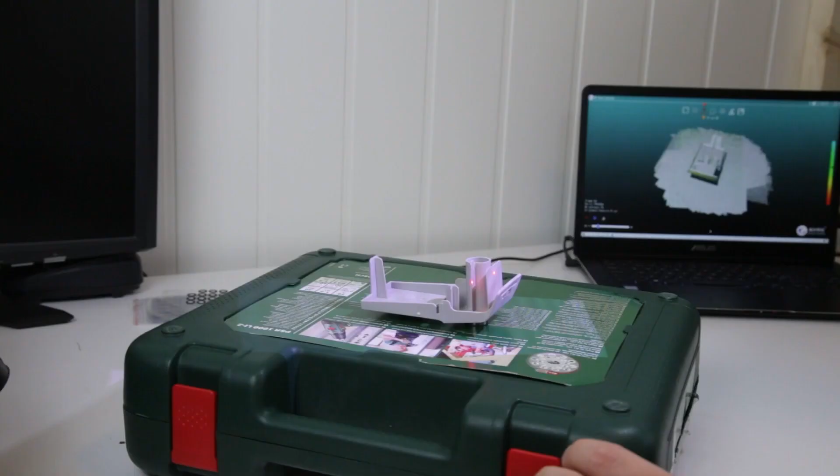Let's first look at some of the specs. This is a handheld structured light 3D scanner designed for capturing objects of around 20 centimeters up to 2 meters, depending on how you're using it. You can always go bigger or smaller, but that's around it. It features a dual field of view mode, meaning you can focus in on smaller objects or cover a larger area, which helps tracking larger objects.

In optimal scenarios, you're getting around 3 million scanning points per second, with an end resolution of around 0.25 millimeters in the mesh. The overall accuracy depends on how you scan and what you're scanning, but it should be below 1 millimeter per meter. This means you have great specs for scanning both large and small objects in this price range, while still achieving really good accuracy. However, as with most scanners, it depends on you, the user, and the object, depending on how you can track them and what the actual accuracy is that you end up with.

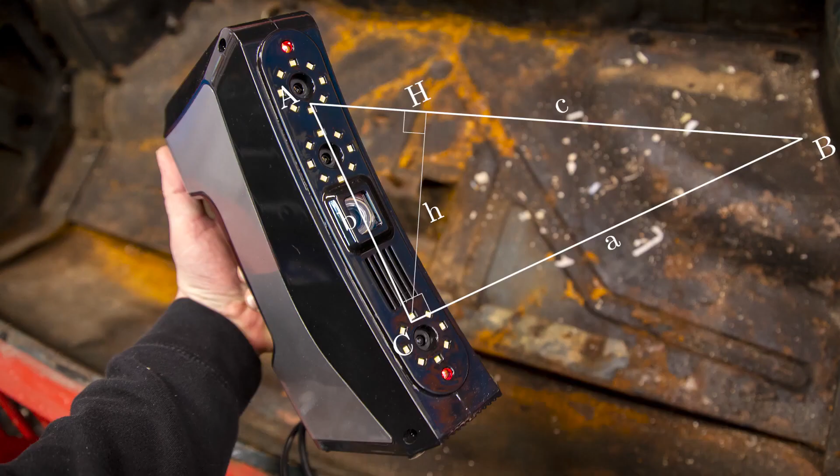The Archer W is a projected light 3D scanner using a white light pattern projected onto your objects. Two cameras then record that pattern from their own angles, and using your favorite algorithm from school, the Pythagoras theorem, which is partially responsible for creating 3D points. Then in the software you add all those 3D points together and get a 3D point cloud, which you then mesh into a mesh file.

The Archer W has both feature and marker scanning. This really helps on some more difficult objects, especially if they are hard to track, symmetrical, smooth, or something where geometry tracking can't really handle it. You also have a hybrid mode where you can combine markers together with good features, which is a really handy mode to have.

Before we review the scanner, let's check out what's in the box and what you get included with it. You get everything you need to scan except a computer. You get software, markers, calibration plates, a turntable which is not powered, and power cables for the scanner.

I'm using my now a bit too old computer for 3D scanning, although my tracking on large scans is getting a bit slow, so bear that in mind when looking at my scanning data later on, that I don't have the best computer. Better RAM memory and better CPU and GPU combo is recommended.

The software is still not Thunk3D's greatest achievement, and I'm using an unfinished release of the software. Hopefully I can provide some good feedback and updates for them. But currently it's not really the best one and I'm not going to focus on it. I expect something better to come along.

In this latest version of the scanning software, we basically set up a new project and have to name it to something random. You can then select if you want to have textures, yes or no. Target type is a bit tricky to understand - what is a universal shape? Flat carving, I guess that's a really flat object. Or geometry cube, which I don't get what that is. So universal object it is.

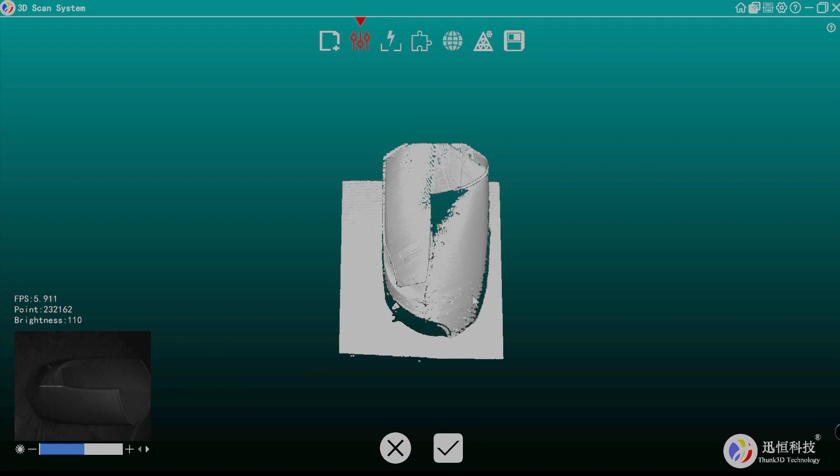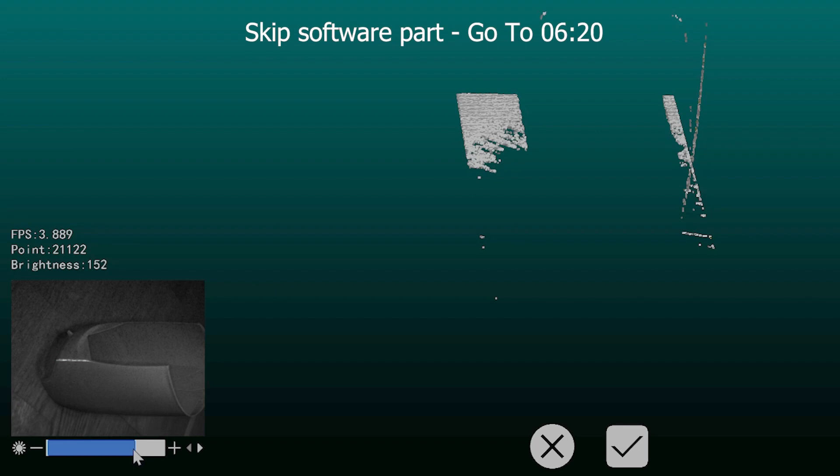If I point the scanner at something and click scan, you can see we're starting to get a preview. Now it's very difficult to understand how well this scan is. If you increase or lower the brightness, you can start to see less details, so sometimes you have to work this up and down to find a good spot for the object you're scanning. If you're happy, you stop the scanner and click OK.

So this is just a random item to show you what we're doing. Now we're feature aligning on a symmetrical object. This object is really hard to track, so I'm not going to do more than that, because I want to show you the settings. We're probably not happy with this, but if we were, we could always start to continue.

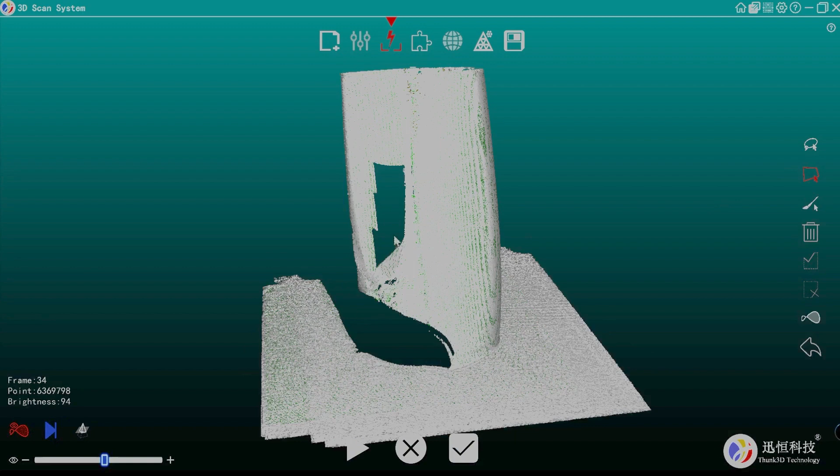To show you the process, I'm going to scan a different object, so let's get started. The next step is that we can remove unwanted data if we want. For example, we can remove this area, just for fun. And then if we're happy, we continue to the next step.

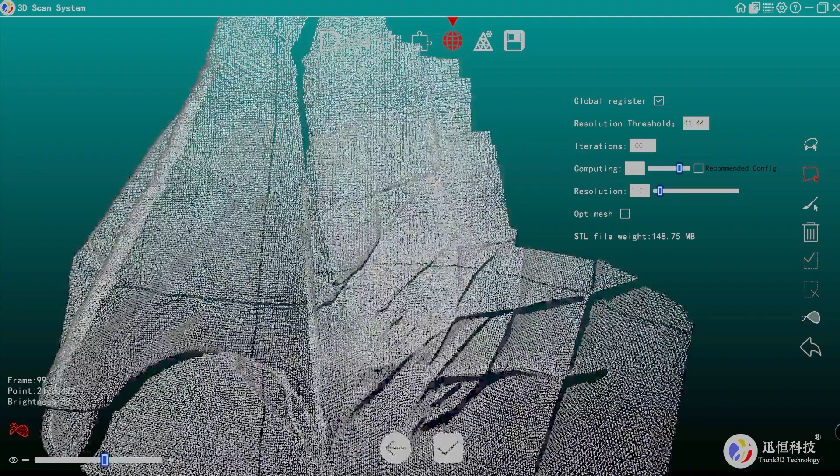So in this step, we have the meshing settings. By the way, you can see all the points here. Oh, that's kind of cool. So let's go for everything.

Resolution, let's go with 0.5 millimeters, we don't need much more. Optimesh, we can do that now or later. It will then process and you can see it as an STL file. And that is the mesh done.

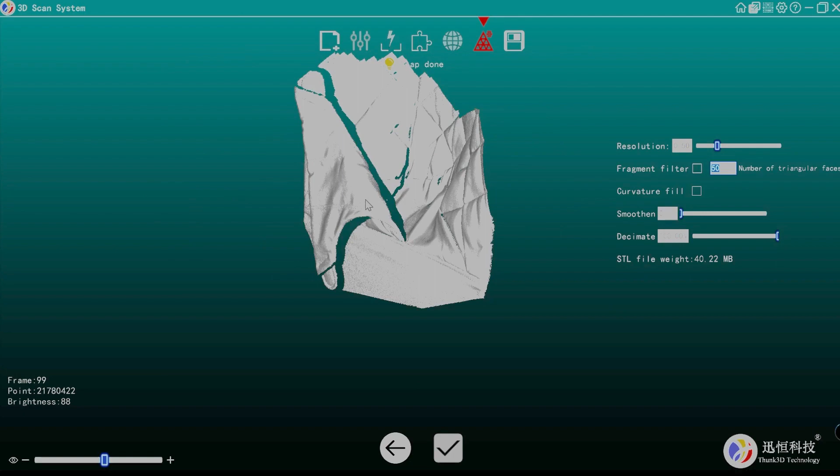It's a bit overexposed here on the screen recording, but basically we get a lot of different details. Very nice. And if we want to, we can change the resolution.

We can do curvature fill. So let's do that with around, let's say, 30 square centimeters and some smoothing. We can do some decimation as well to optimize the mesh, but we don't have to do that now. So let's reprocess. Ah, there we go.

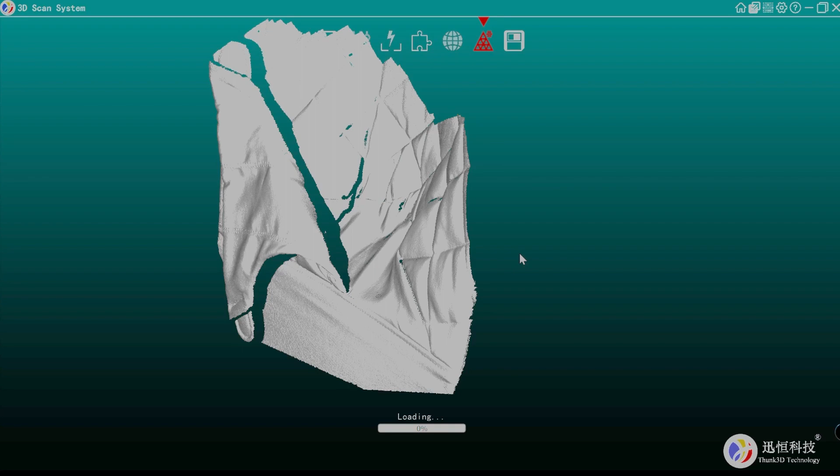Now you can see it's smoother. Some holes are fixed, some are not. But yeah, it looks better.

So if we're happy, we can click this icon and we get our STL file and the refined version. So you get the raw and the refined, and you have all the raw data if you want to process it. But yeah, you have all that you need.

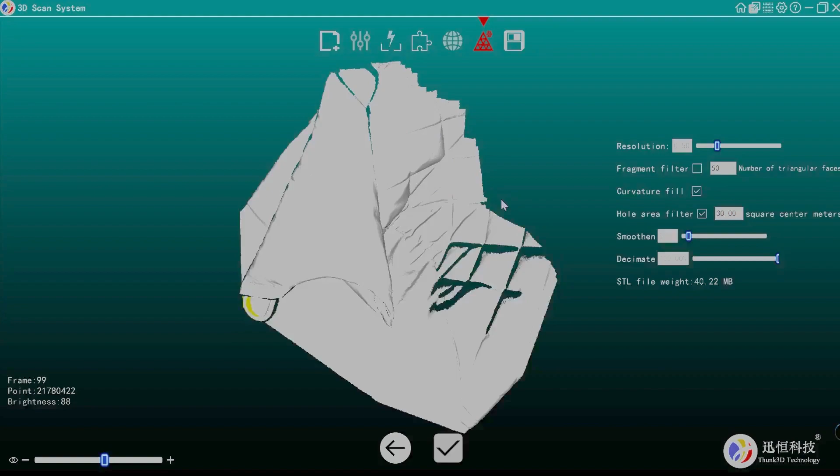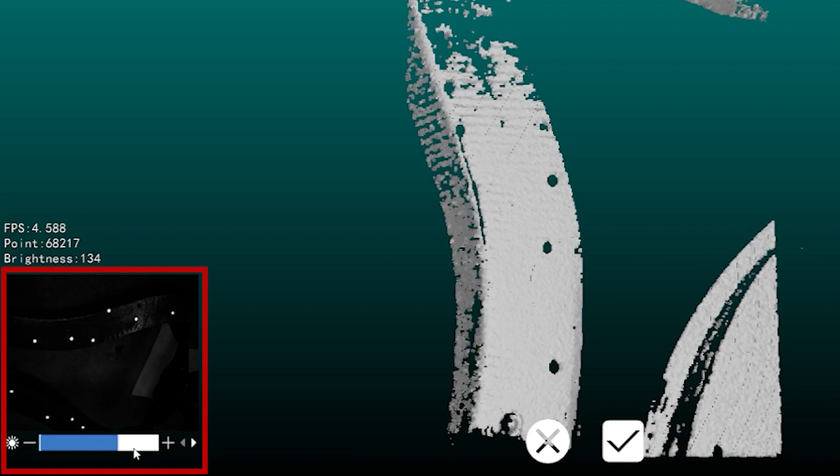In this stage, before you start scanning, it's important to make sure that you're actually capturing the data. Sometimes you may have some issues with brightness being too dark or too low. This is a really good time to start spraying your object down if you need to.

So if you have a really dark, shiny surface, like this plastic here, you will need to spray it down with some contrast spray. I'm not sponsored by AESUB, but I really like their type of product. There are many different scanning sprays out there.

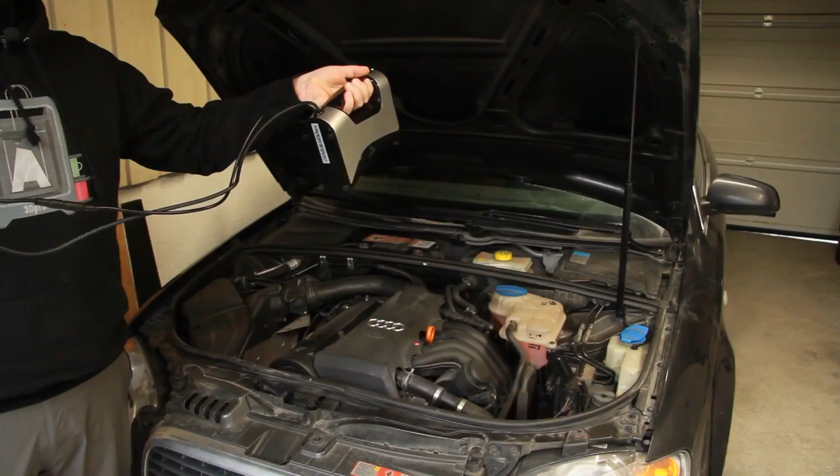As always when scanning, you have to try to cover everything and keep the scanner focused on the object. The RTW, together with the Fisher S, has these laser dots that make it easier for you to track where you are if you can't look at the computer screen while scanning.

If we are happy with the scan, you just stop the button on the scanner and it's time to process. You can of course choose to continue scanning if you turn the model around, for example. You can also remove unwanted mesh with the mesh editing tools.

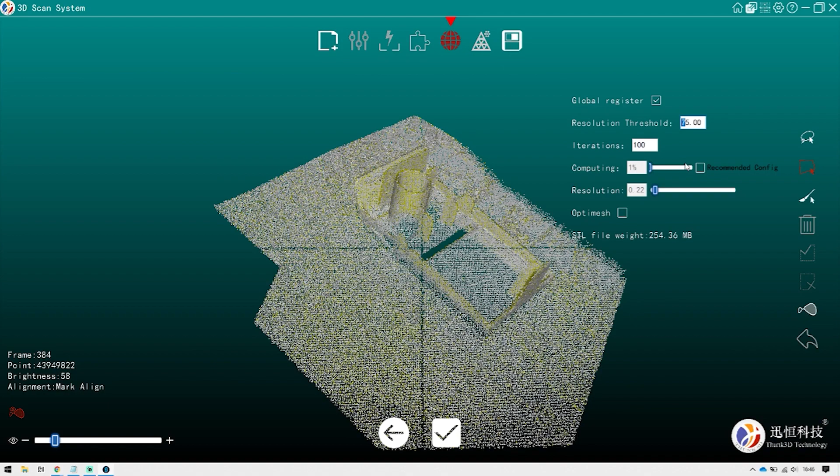Processing is a bit more tricky. We get a lot of different options, but hey, in the end you have an STL file that's put here in your folder. It's not really named or saved according to the project, but it's in there and you have to find it. Again, the software is a bit messy.

So now you know how the scanner works and how the software kind of works. But is it any good? Well, to do that we have to scan a lot of objects. So let's see some examples in use.

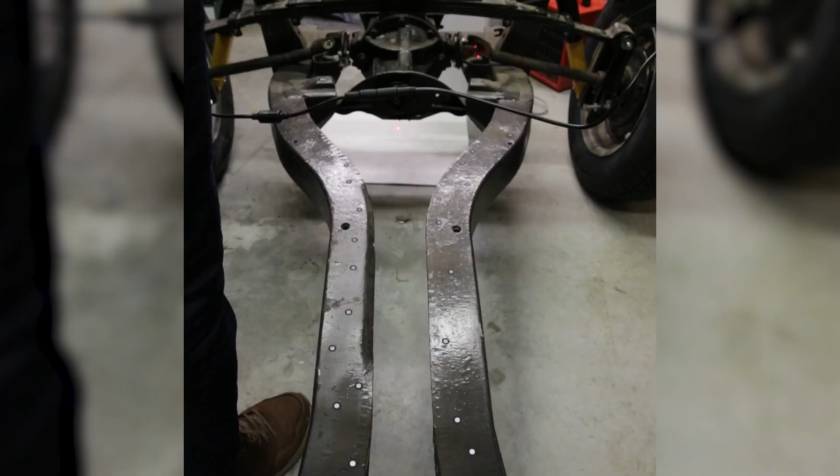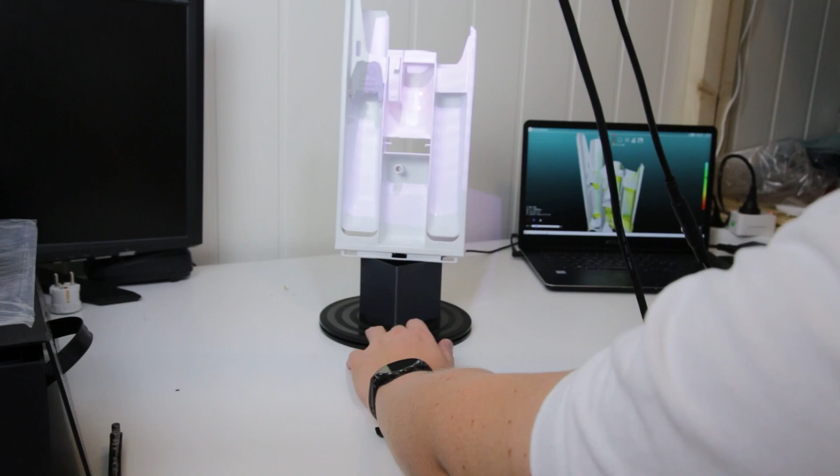Let's look at a few scans. So as you can see here, I'm scanning without the markers on a turntable. This is a part of a washing machine. The mesh looks really good.

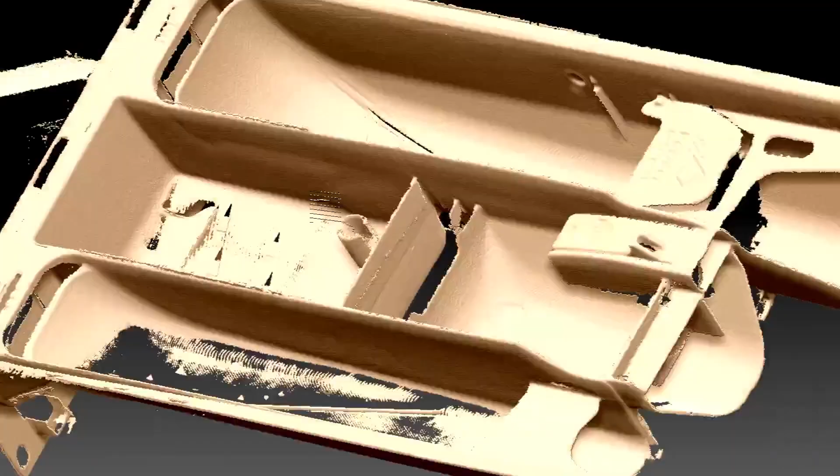There's some open areas that are due to really thin geometry, so it couldn't really mesh those areas, but I still think this is a really good scan, especially with the surface being as shiny as it was, and that I didn't use any marker. So it's quite difficult for the scanner to track. You can see there are some artifacts from the geometry because of this small, thin, dual-sided scan. But it's workable. You can use this as a reference for whatever you want. And the detail is pretty good.

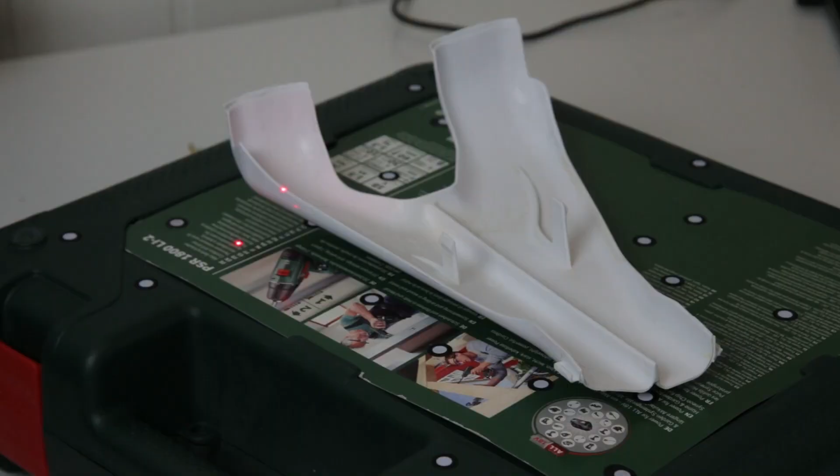Next up, I wanted to use the markers to really push the scanner. This is a pretty small part as well, some matte, shiny plastic. Using the markers, we're really getting better resolution. We're getting better precision and therefore better resolution. I can push the meshing a bit more.

These scans are really high detail. You can reverse engineer this without any real issues. I think this looks amazing. You can even see all the small indentations from the forming from the tools. That's really cool. That's impressive.

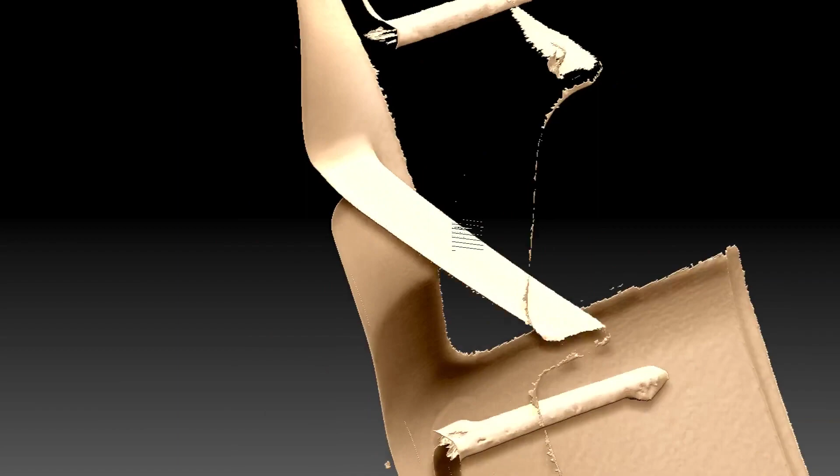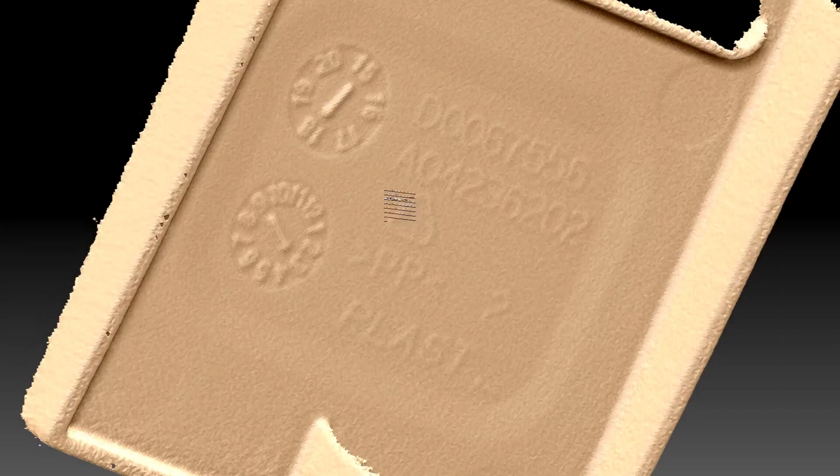So next up, we're going even smaller, even more detailed. Now I'm not using any markers, and this is just for trying it out. How well can I make it? You can see I can mesh this really well. I can see all the small indentations in the plastic. So we have PP, I can see when it's made. I think that's really nice to get these kind of details in the meshing. You can always put some more settings for hole fillings and all that, but for the use case, we don't need it.

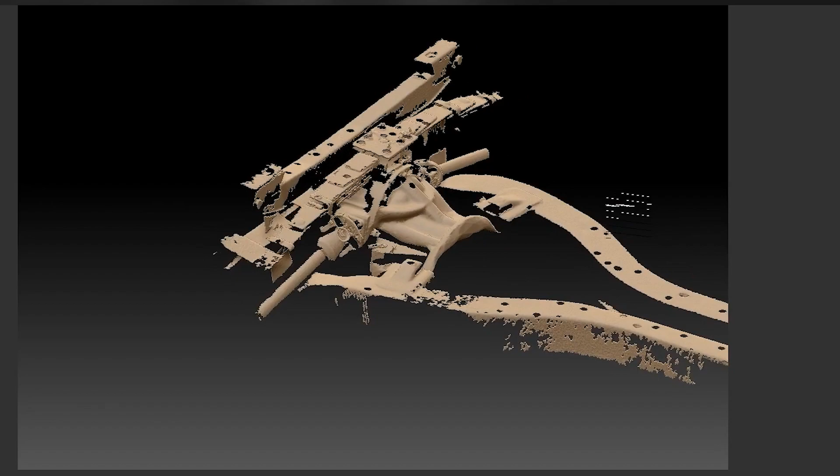Scanning the chassis of the old Triumph in my dad's garage, that's difficult. Even with markers, the texture, the surface itself is really tricky, but I think it made a good job with that really shiny old black paint, this really thick black paint. Again, it's not a complete scan, but depending on what you're doing, what you need the scanner for, for example constructing a battery bank or a gas tank, this is enough to see where everything is.

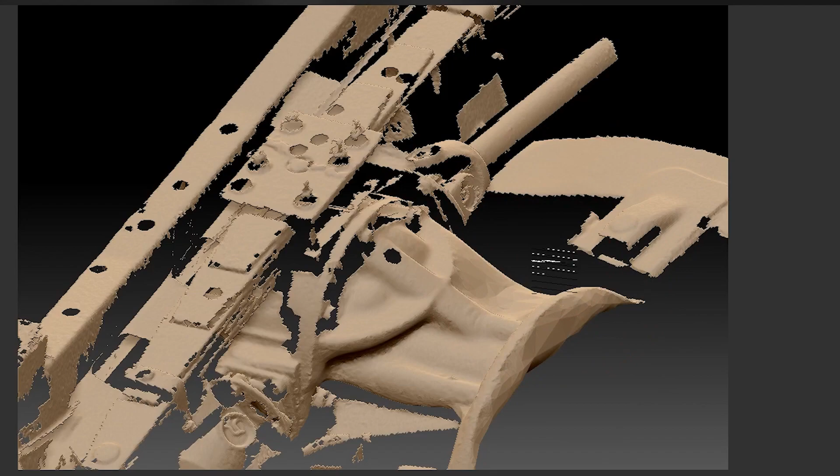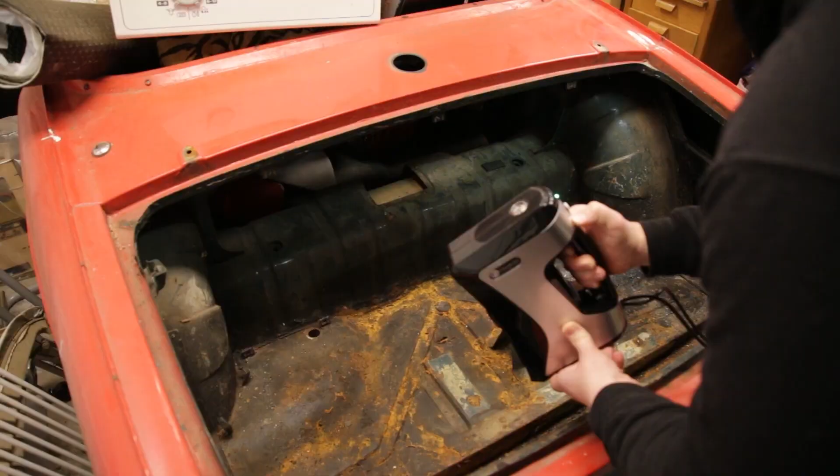You get a good representation on which surfaces you can attach points to, but it's not like a complete high-end reverse engineering. But it's still a fantastic reference for building parts for this car. The same goes with the trunk. This is not an optimal surface, but it's a better surface to scan, and the results are very well.

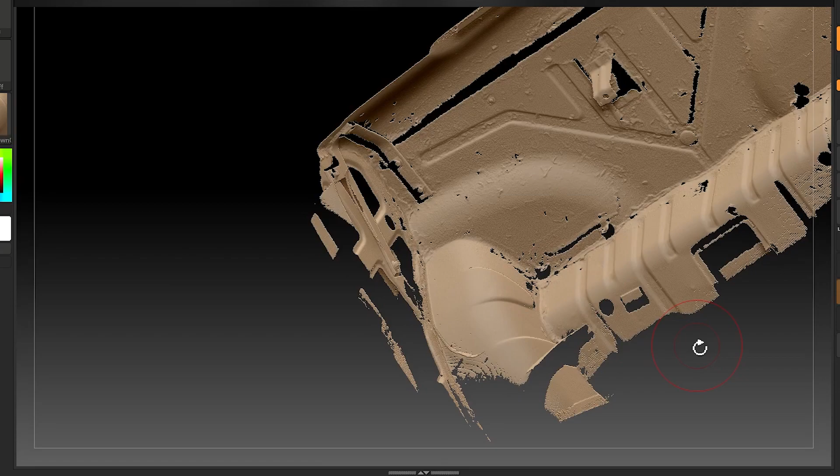This is perfect for being able to mount batteries, as we're doing in this case. And it's really nice to be able to see all the volumes, all the fasteners, where every corner is and how the volumes are represented. So I'm really impressed with this. This is very nice for a handheld scanner and for just point and shoot, without really setting up or doing any spraying or anything like that.

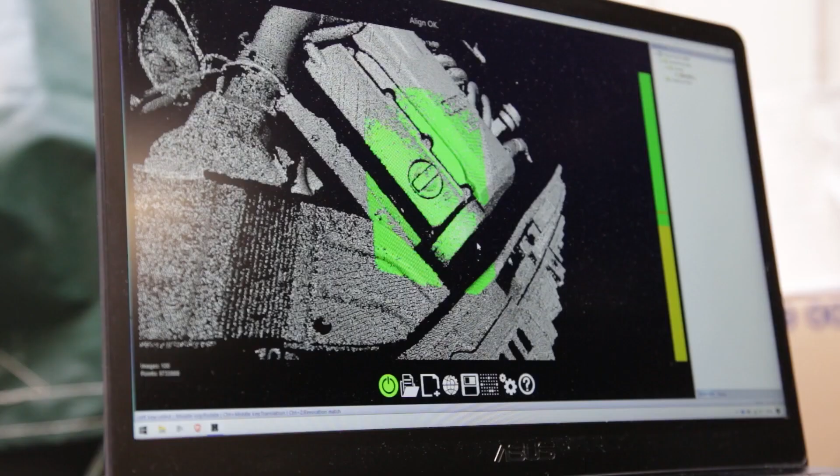So during the weeks, or actually months, that I've been using this scanner, it's obvious to me that it's not really the best scanner for dark objects, which really no scanner is. It's very difficult to make a scanner that's good on black and dark surfaces, especially when you have a projected pattern that you have to be able to detect on that dark surface. So scanning dark is actually a bit more difficult than I expected.

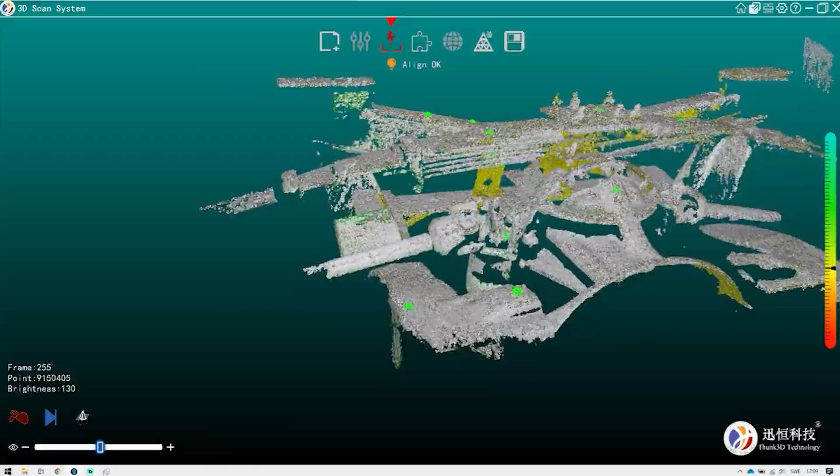With the newer software, and I've gotten some updates during my testing period, I find it getting even better. It's faster, it tracks better on the dark surfaces. It's still a confusing software. Again, my recommendation for anything shiny or really dark, or transparent for that matter, is some sort of scanning spray. And that's generic—you need that for almost any type of scanner.

You can pay a lot for a scanner that does better on chrome, but then you have to pay like 10, 15, 20 times as much as this. It is a bit expensive going around with these sprays, but it's still worth it to get good data.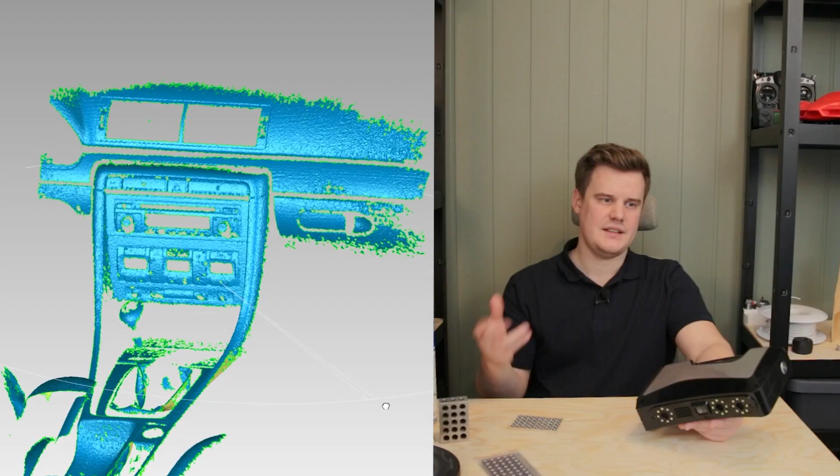And also scanning inside this Audi, you can see on the instrument panel, for example, it's very hard to scan these mixed surfaces of both shiny and matte. You probably should spray everything down, which I didn't want to do in my car, but I want to show you how it handles impossible scenarios. So yeah, you get some data, it's enough for some applications. It's not a perfect scan, but it's good enough data for a lot of things.

And that's without spray. So obviously my conclusion on that is that, as with any other projected light scanner, you really have to prepare your surfaces, either with spray or matte them down or not washing them. It's really important to do that, otherwise you're not going to have a great scanning experience. That's not at all unique for this scanner, that applies to everyone. You can't really just point it at something random and expect it to scan well. You have to prepare the brightness, surfaces and all that.

And also when scanning people, it works really good for busts or heads, but if you try to scan the whole body, it can become a bit more difficult, and I don't really recommend this scanner for full body scanning. Half body is okay, but especially head and bust. You can see the scanner is fast, it works. We can't really get hair, but that's expected with a projected light scanner. When you project light on hair, there's really nothing to reflect back, since the hair is so fine. Unfortunately, all of the projects I did with a full body were very complicated and I can't show them.

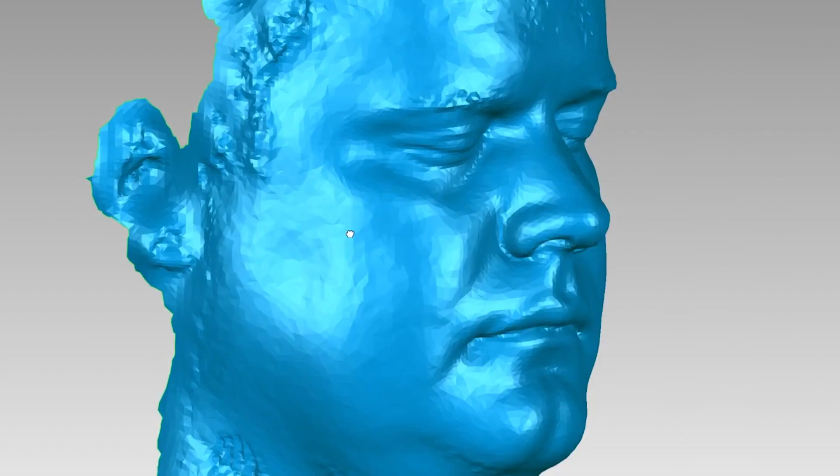So about the texture, if we take this scan of my head, for example, you can see that the mesh file is actually pretty good, but the texture file is not really something you want to use for professional work. I would say texture and color scanning works for references, but capturing objects, for example, for VR or VFX, or creating digital copies of museum objects or cultural heritage, maybe it's not that good. Maybe you want to combine photogrammetry and 3D scanning to get some good textures and all that.

The accuracy is actually really nice. I can't really measure the accuracy, but the resolution is really great. For anything this large, which this scanner is designed for, you don't need more resolution. You end up with too much data to handle, and you get sharp details and detailed curvatures. That's really what you need.